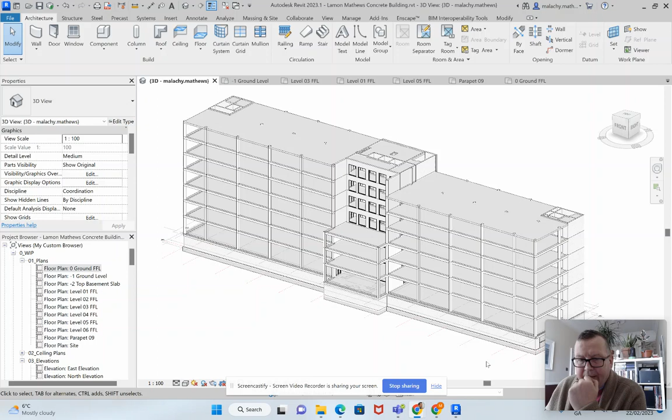Now, students, I wanted to do a finishing kind of round off for this. I've made some more changes, or just really more tidying up than anything else. So if you can see here now, I've tidied up that section there, okay?

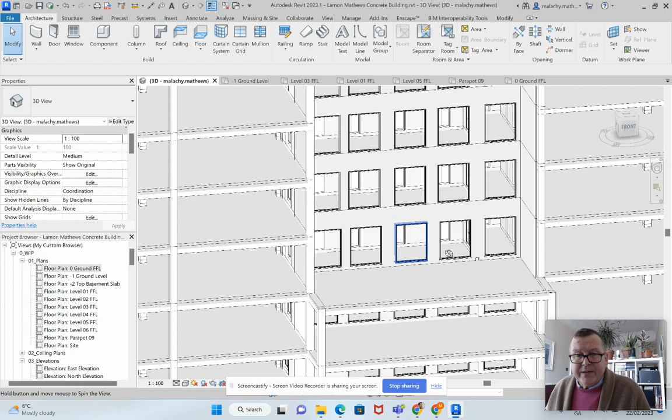I'm going to show you the different wall types that I have. As I said, that's just a window, single plain 2.1 by 2.6, and I have slotted that in there.

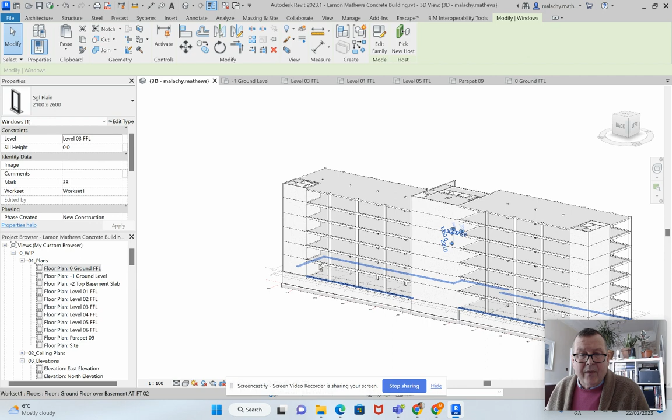I want to bring you around the back here because I want to show you that I've tidied up all of that. So now that looks like it's continuous pour the whole way up. On the inside here as well, I had to tidy it up. That's all tidied up, worked out quite well. I've got the kicker in where required on the floors, okay?

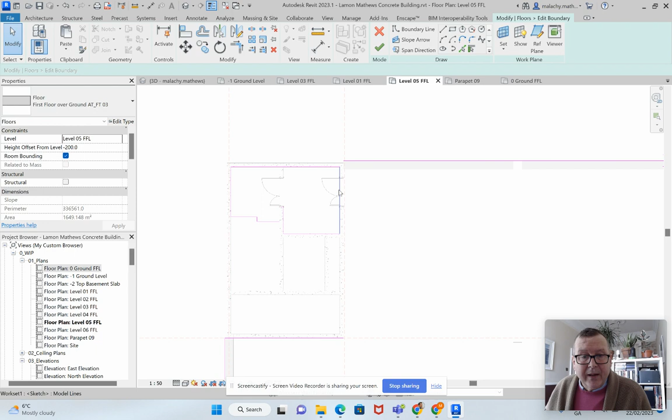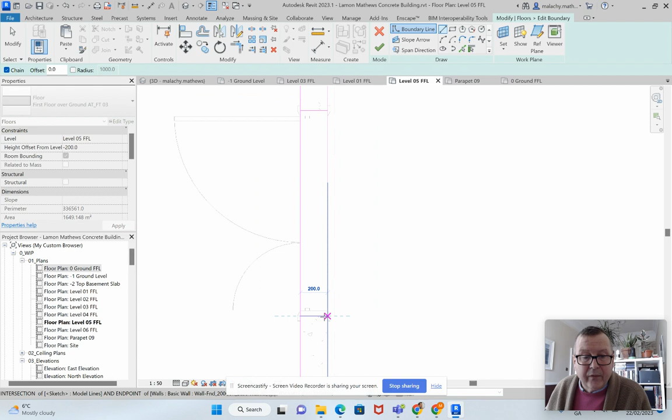I want to show you how I did that. So if I go into level 5, select this and edit the boundary, you can see that the main floor comes this way, okay? So I've come out, I've taken that bit out, I put this piece in because this is our landing area here. Now there's a little gap there, and I could probably solve that by splitting these two and joining up those two. I'll just show you how to do that. So I'll split, and I'll split there. And then all I have to do is draw a line across from here to here and here to here. And then I'll get out my fillet tool. And now that should work. Bring it out here. Yeah, so don't attach.

Now I've got a clear walkway through here onto the landing for the stairs. And the advantage of taking out the floor that was around the corner here is that now I can stop the slab edge kicker at the start and finish of the core area here. So I went around and did that for each of the cores there.

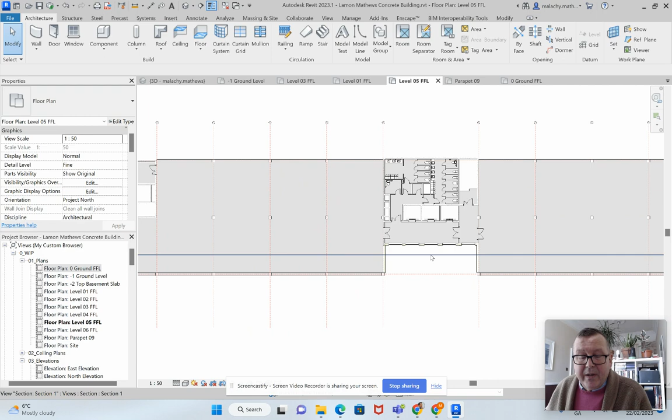Now I want to show you what I did down here. Okay, this is now external. So if you remember, this is the poured wall that I'm bringing all the way up. And what I've done with it, because when it comes out of the ground it needs some insulation, is I've put in some external insulation, and I've just finished it with a render here.

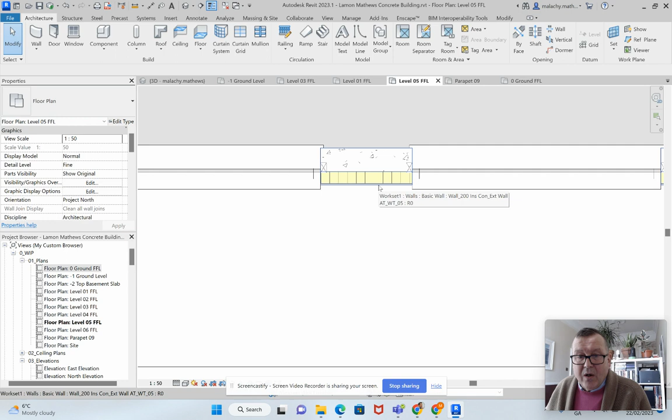Now we might decide to put in cladding there, might not. I think personally I prefer to concentrate on the cladding on these elevations rather than this one here. I think it looks fine.

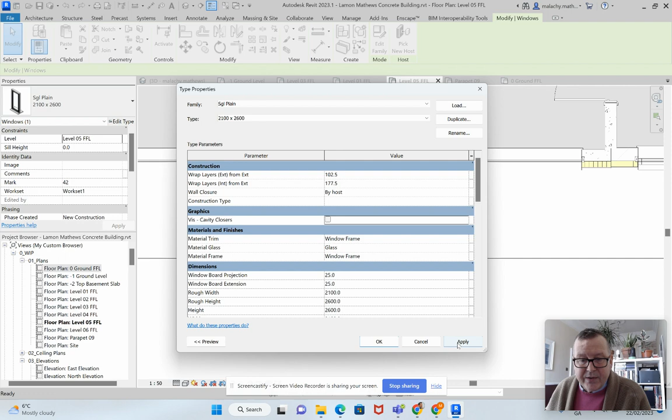Okay, see those little timber things, I want to get rid of those. So I'm going into edit type and I'll just turn off the cavity closers like so, and they should all disappear.

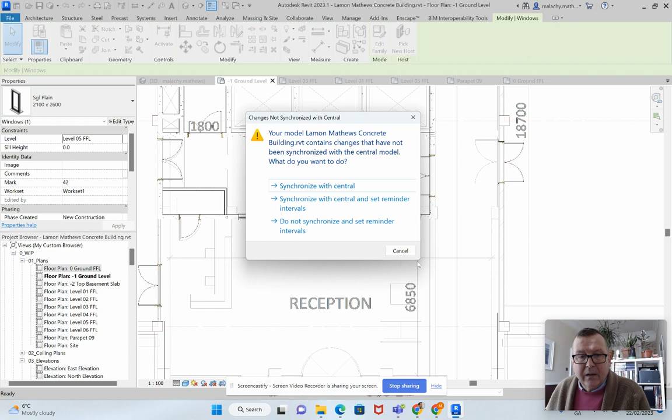Now, over here what I've got is, because this is the cast wall that is coming up from the bottom all the way up, but it's not happening here. And if I go down to the ground level, I'll show you why. Because we've got that kind of corridor there.

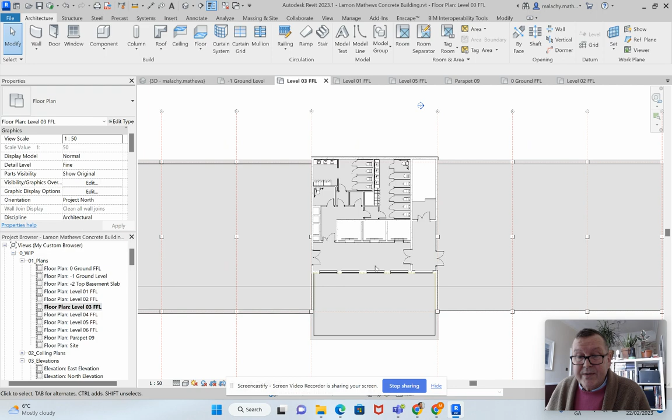Okay, we've got that corridor there. If I go up to level 1, you can see that it closes in. So what I've done, you can see level 1 is inside, so I don't need insulation. Level 2 is also inside, so I don't need insulation. Level 3 is now outside, so I put in a 215 wall with external insulation around as far as here to join in with the cast wall that's coming up the whole way through. Now that has insulation on it, and I've also obviously beefed up that wall there to 215 with external insulation on it.

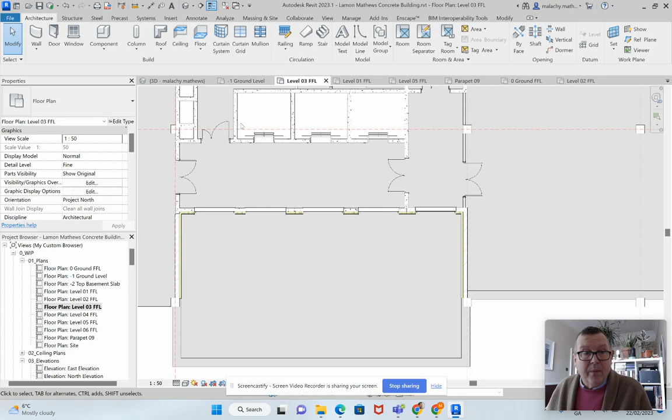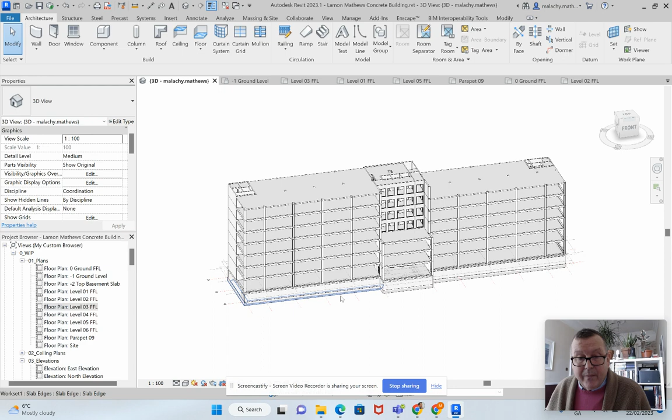Now that goes the whole way up, if you like, and that's how it is looking there now, like that. I'm much happier with that now. I think I'm in a position now to tackle the roof and the core and plant rooms and things like that to see what's going on there. But as far as I'm concerned, I've got my basement all the way up to level 5 and 6 more or less sorted out. And that is a good place to kind of put a full stop under that part of the building construction. Okay.